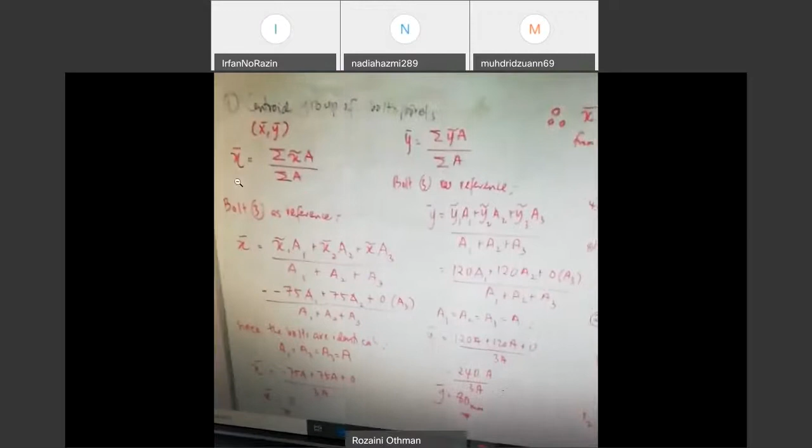And tetapi when we zoom in, actually what we want to determine is actually the shear loading on each rivet atau bolt, and then the shear stress. Right. So when we talk about shear loading, dan sebenarnya okay, saya rasa saya boleh saya nak try cuba buka apa ni

kalau kamu tengok dalam nota, if you refer the nota, so we just browse through the notes. Itu ni, tunggu sekejap ni. Rivet. Okay, this one is a bolt. Okay, bolt, alright. Okay, rivet. So, yang ni tak apa, ini just ni, yang ni kamu boleh baca sendiri. Yang ini pun saya dah explain dalam ni.

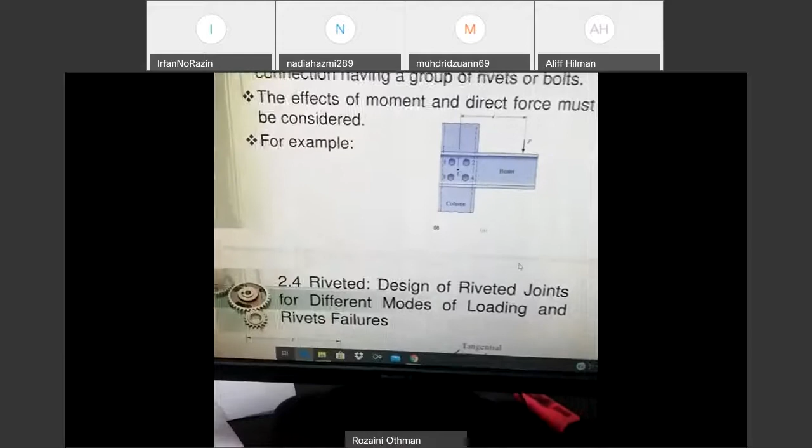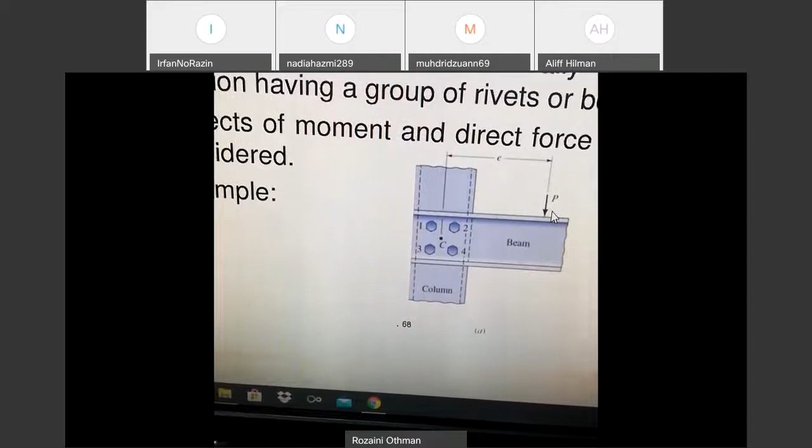Right. So sebenarnya, so just kita review sikit. Actually, when we talk about shear of rivet due to eccentric loading ni, sebenarnya is actually we have first a group of rivet ataupun a group of bolt. And let's say we have rivet number 1 and rivet number 2, 3, 4, and bolt number 1, 2, 3, 4. And then there is a force P ataupun external load P, and then this external load is actually at a certain distance from a group of rivet. Maknanya kita ada group of rivet ataupun bolt, dan in this group of rivet, we need to determine the C, which is a centroid.

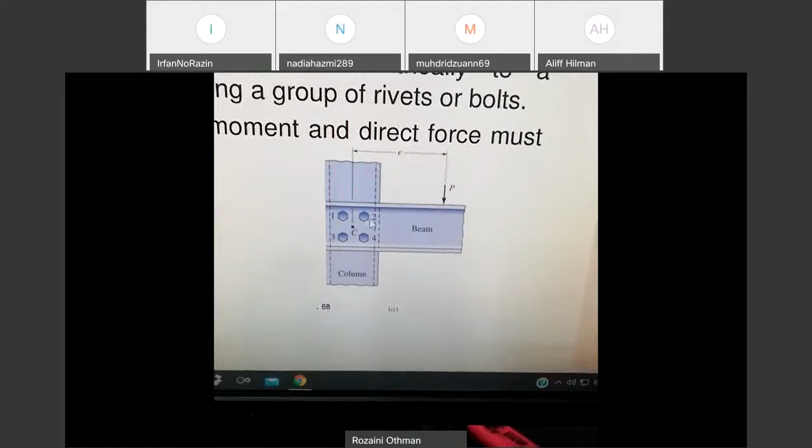So there is a load, external load P, which is exerted on the beam to the group of rivets, and then this P is actually at certain distance E, and this distance is perpendicular, so it can create a moment.

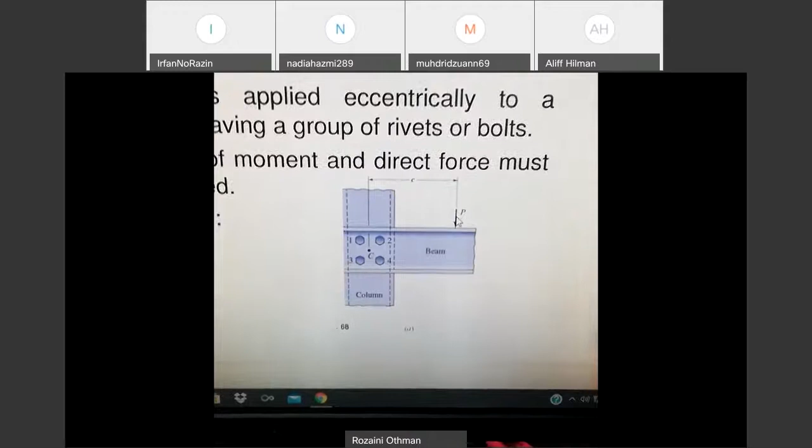Then there will be a moment M. So M equals P multiplied by E. P is an external load, E is the distance from the centroid to load P. So we have centroid C, then we have P, and a certain distance from C to P.

So when we have a force P and then a moment, there must be a reaction force acting on each rivet. There will be a reaction force. So that's why if you look, there are two types of reaction force. One is what we call direct shear, which is actually a reactional direct shear force.

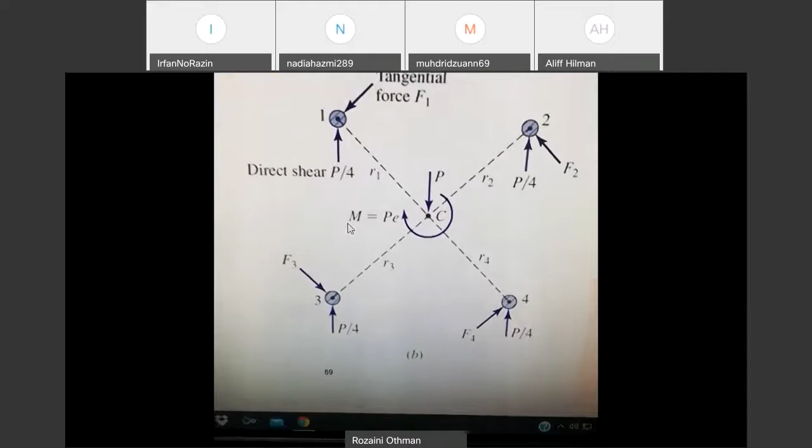Direct shear force or reaction direct shear force is actually the force P applied, divided by the number of bolts. In this case, we have 4 bolts or 4 rivets. So direct shear force, P is divided by 4, by number of rivets, meaning each rivet will have equally the same value of P. We need to divide by number of rivets. So that's the direct shear force.

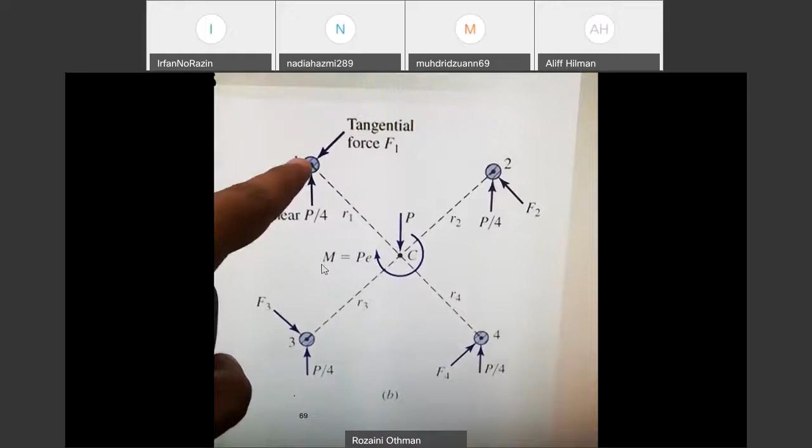Then for each rivet or bolt, we will draw one line which is the distance from rivet number 1 to the centroid, rivet number 2 to the centroid, rivet number 4 to the centroid, and rivet number 3 to the centroid. So this is the line from rivet to the centroid. From these lines, we can have a perpendicular force.

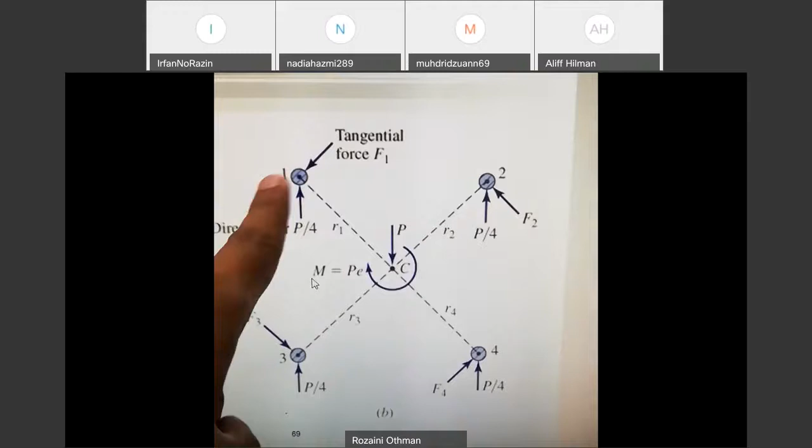This perpendicular force we call tangential force. This tangential force will create a moment. Earlier we had moment M equals P multiplied by E, right? So this tangential force will create a reactional moment, a reactional moment to the centroid, and its direction must be opposite, opposite direction to moment M.

So that's why you can see the forces, the tangential force is in this direction. It's not upward, it's downward like this. Why? Because it will produce a moment, force multiplied by this distance. Now this distance is R1.

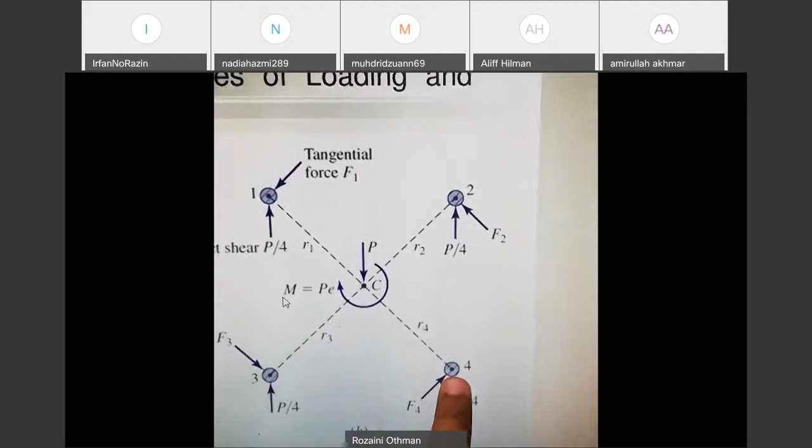R1 means the distance from rivet 1 to the centroid. R2 is the distance from rivet 2 to the centroid. R3 is from bolt or rivet number 3 to the centroid, and R4 is the distance from rivet or bolt number 4 to the centroid.

So this tangential force or reactional tangential force is actually creating a moment in the opposite direction of moment M, so these forces create moment in a counterclockwise direction. That's for rivet/bolt number 1, same also for bolt number 2, rivet number 2. So if you look at the direction like this, it will produce moment in the counterclockwise direction for both.

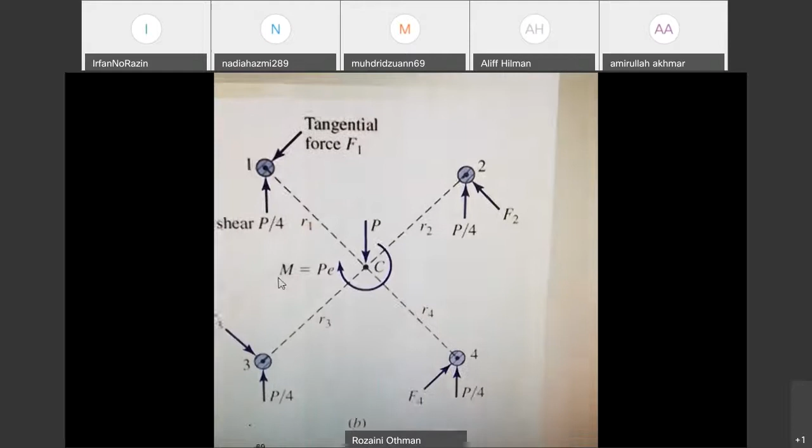Meaning every rivet, rivet 1, 2, 3, 4, will have two forces: the force due to direct shear force and the force due to tangential force. So this is the eccentric loading, or the analysis that we will do.

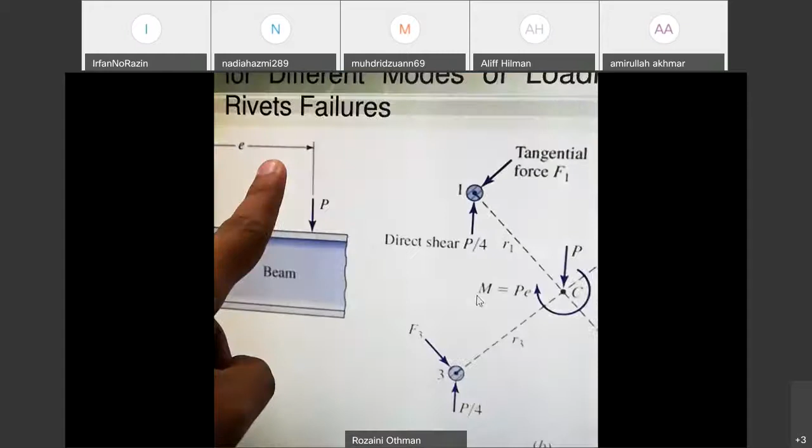In this topic we will have a group of rivets or a group of bolts. Then this group of bolts will have force P applied at some distance from the group of bolts, and so it will produce a moment. That's why there will be a distance from the centroid to the force P, given by E. So there will be a moment because of this external load P.

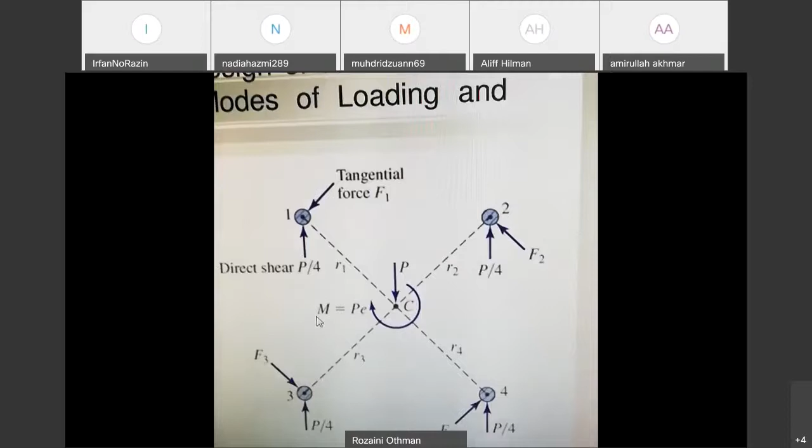But what's important is first we need to determine the centroid. Don't worry, later we will look at an example. So first we need to determine the centroid, and then we have to determine R1, R2, R3, R4, and then direct shear force, and then tangential force, and then we have to analyze for each rivet or bolt, because each rivet or bolt has two types of forces: direct shear and tangential force.

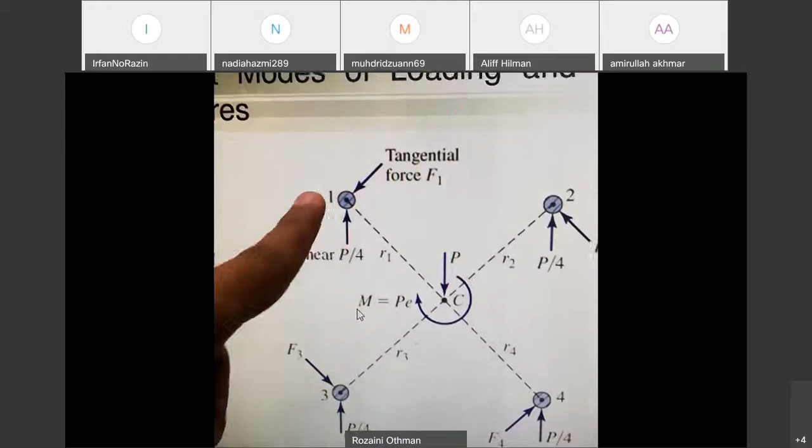So we have to do a summation of forces. Because this direction is in y, we can resolve this tangential force into x and y components. So we have a summation of force in x and y, and then we have a resultant of forces for each bolt or each rivet.

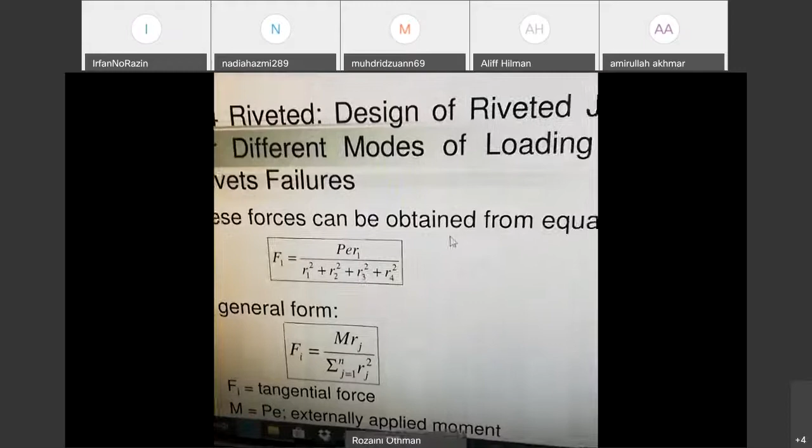If for rivet number 1 or bolt number 1, F1 equals PE, where PE is the moment. Moment multiplied by R1, since it's for rivet number 1. If rivet number 2, then R2, so it becomes F2, R2. Below this is the distance from each rivet or bolt to the centroid.

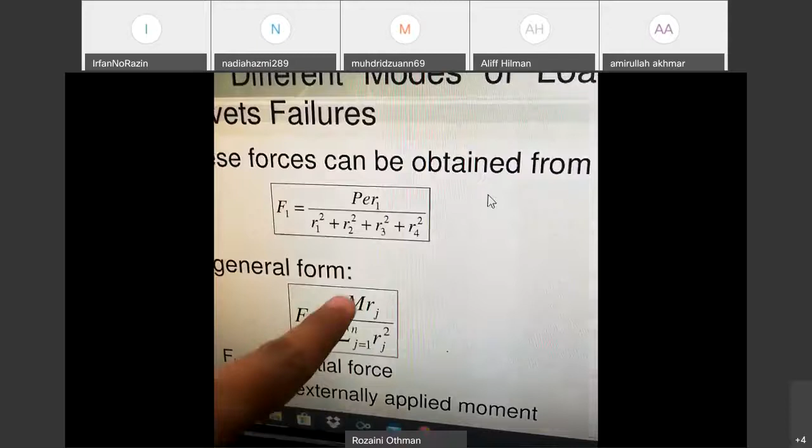But in the exam, the formula is given in the general form. So you need to know this general form, and from this general form, it actually becomes this.

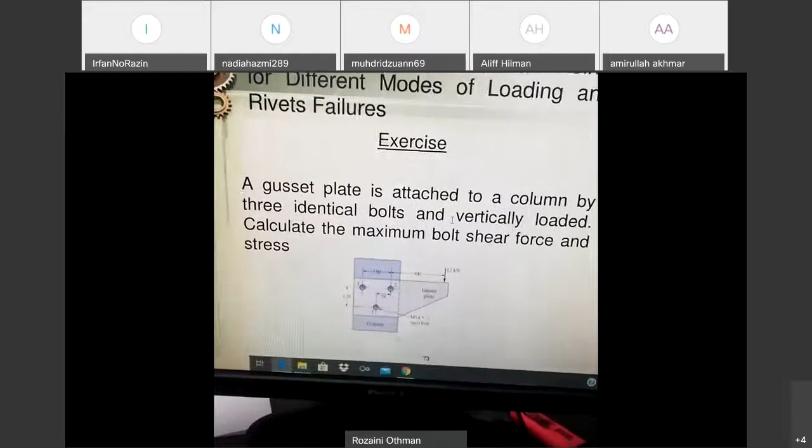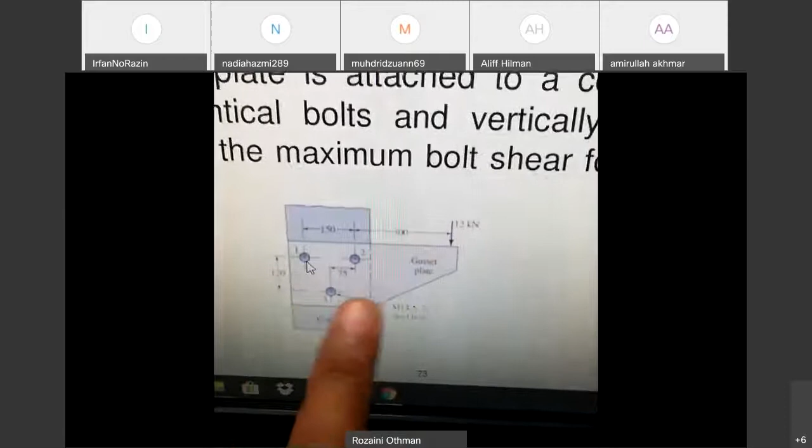In this example we will have 3 bolts, and it could be bolt or rivet. So say we have 3: bolt number 1, bolt number 2, bolt number 3. We have a force of 12 kilonewtons, and we have a steel bolt.

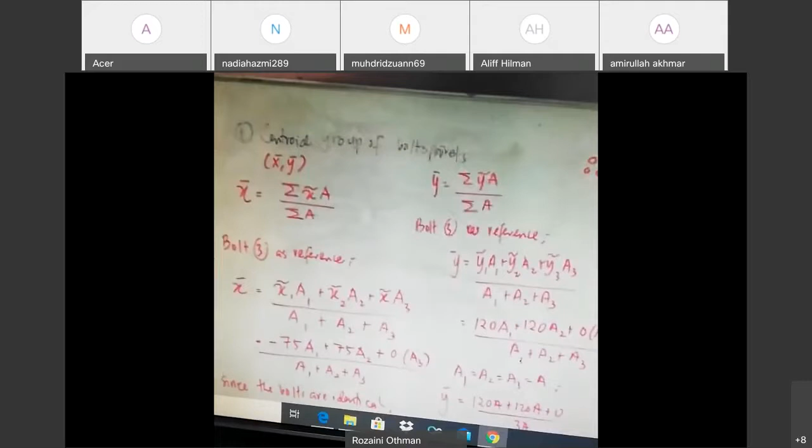In the previous class, if I'm not mistaken, I used bolt 1 as reference. So the reference actually, it depends. Sometimes the question mentions to you to use a certain bolt or rivet as reference, but in other questions maybe it doesn't require or mention which bolt or rivet to use as reference.

So it depends on you. In this case, I just take bolt 3 as reference in this example, while in the class example I used bolt number 1 as reference. So you can see the difference.

Okay, the equation we use, this equation, I'm not sure if it's given in the list of formulas. So in order to determine the centroid in x coordinate and y coordinate, we use this formula: summation of x bar A divided by summation of A.

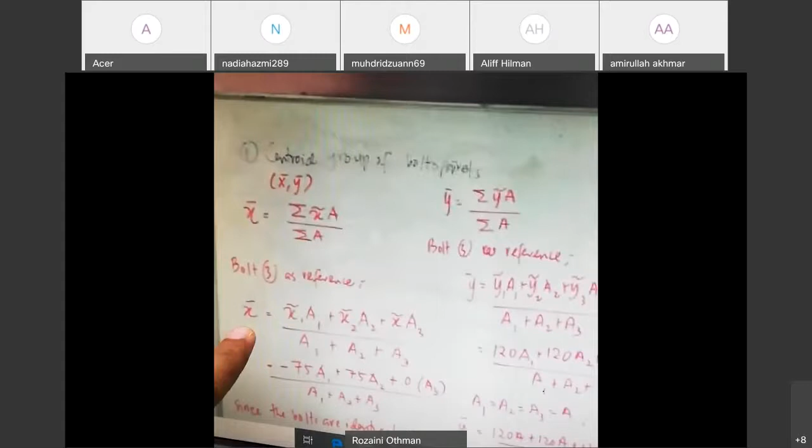So for example, we take bolt 3 as reference. So x bar equals x1 bar a1 — this value is referring to bolt number 1 or rivet number 1 — plus x2 a2 plus x3 bar a3, divided by a1 plus a2 plus a3.

Now, in this example, I put negative 75. Why? Because in the question, if you look at it... where was it...

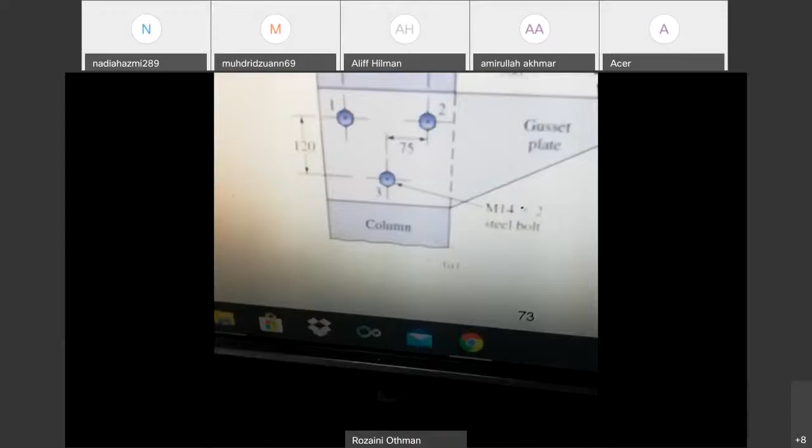Dalam soalan ni, bolt number 3 adalah reference. Bolt number 1 sebenarnya di sebelah kiri, in the left side, so left side kita ambil sebagai negative 75. Jadi negative 75 times dengan A1.

A1 bolt. Dan kemudian plus, bolt number 2 sebenarnya 75 daripada bolt number 3, dan dia ke kanan, so 75 A2 plus 0, sebab bolt number 3 sebagai reference. Reference dia tak ada distance, kosong. Kosong A3, divide by A1 plus A2 plus A3.

Disebabkan dalam soalan mention bolt are identical, bila identical ni sama, bila sama maknanya diameter sama, area semua sama. So area for bolt number 1 equal to area bolt number 2 equal to area bolt number 3, equal to A. Kita just letak A. Kalau nak cari nilai A pun tak ada masalah, A ni area cross sectional area, A equal to pi d square over 4. Sama je sebenarnya, tetapi untuk memudahkan jalan kira, kita just represent A, dan disebabkan semua bolt sama.

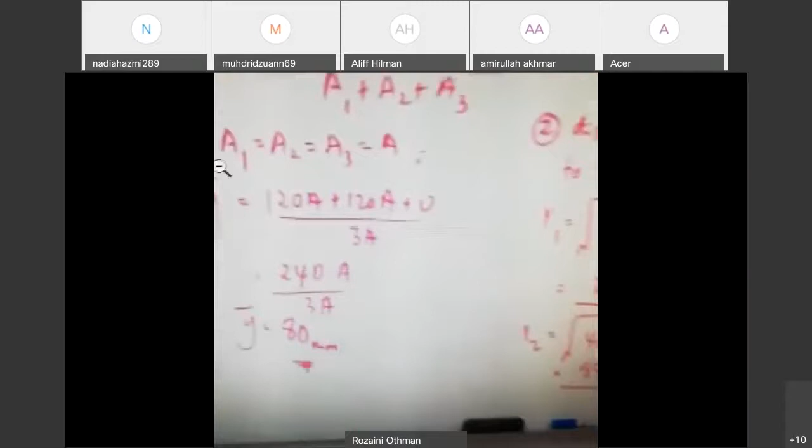So kita akan dapat Y bar sama dengan 80. Apa maksud dia? Maksud dia kedudukan Y ni, dia adalah 80 mm daripada C dan dia berada di atas. Bolt nombor 3 kan 80 mm.

Maknanya sekarang ni, bolt nombor 3. So X kosong maknanya dia dekat sini, dekat tengah-tengah ni. Dia dekat sini, so line ni. Lepas tu dia kata 80 daripada 3, so daripada sini 80. Maknanya lebih kurang tengah ni lah. So kita akan dapat macam ni, from bolt number 3 dia (0, 80).

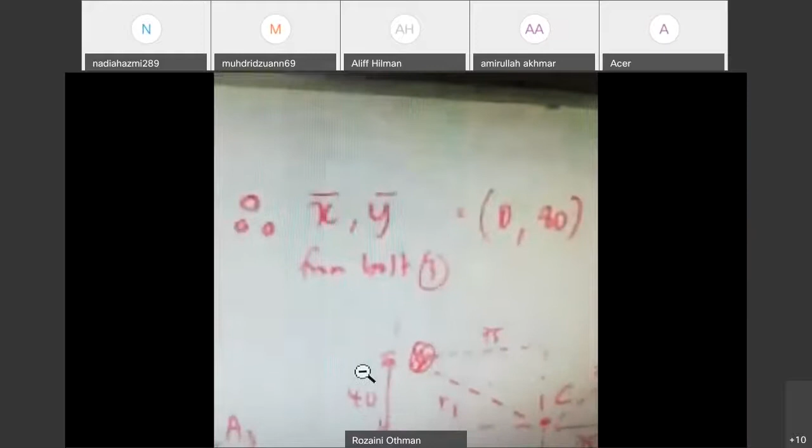Kalau kamu perasan dalam previous class kita buat bolt from bolt number 1. From bolt number 1, X bar dia tak sama, X bar dia daripada bolt number 1 dia 75. Maknanya kalau daripada bolt number 1 ni dia 75, 75 daripada bolt number 1 ke kanan sini. Lepas tu Y dia 40, maknanya daripada rivet number 1 sebagai reference ni 40 ke bawah. Actually sama je sebenarnya.

Apa yang penting ni kita nak determine dia punya centroid of group. Centroid ni adalah centroid bagi group of rivet. Kita ada group dia, bentuk dia macam ni, so kita kena cari titik tengah bagi group ni.

Okay, boleh saya rasa saya explain banyak ni. Harap orang faham lah.

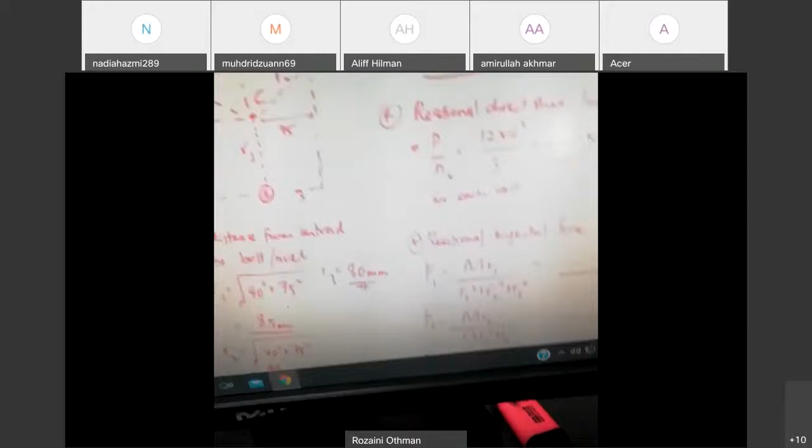Okay, anyway, right, so this is centroid dia. Centroid dia kat sini tengah ni. So kita ada R1, R2, R3. Seperti mana yang saya sebut, R1 is a distance from rivet ataupun bolt number 1 to the centroid. R2 is distance from rivet 2 to the centroid. R3 from rivet number 3 atau bolt number 3 to the centroid.

Baik, so this is center dia. Kemudian sekarang ni kita nak cari nilai R. Jadi kita cari nilai R. R dekat sini distance dia, jarak dia berapa? So dia hypotenuse kan?

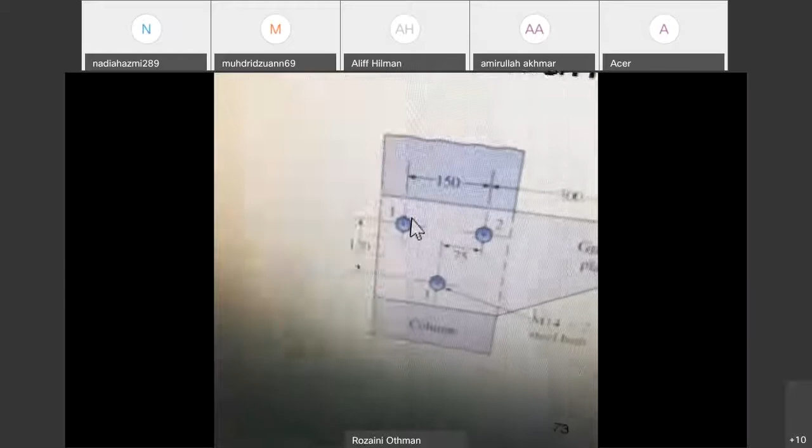Remember, moment is actually from the external load to the centroid of a group of rivets/bolts. Ingat centroid. So in this case, P is 12 kilonewton, E is the distance, 0.3 plus 0.075, this is the distance from load to the centroid. So we get the value of M.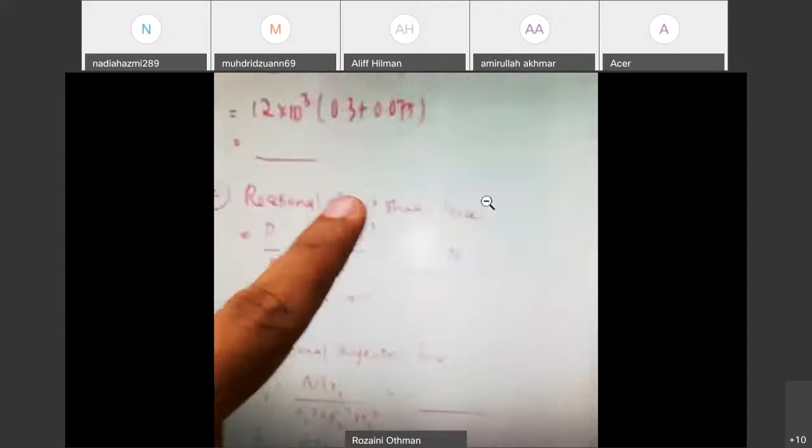Okay, try calculate while listening, I'll give you time. Then the fourth step is you need to calculate the reactional direct shear force. Reactional direct shear force is the external load divided by number of bolts. So we have 12 kilonewton divide by 3 number of bolts, so we get 4 kilonewton. That's the fourth value - remember reaction direct shear force value is external load divided by number of bolt.

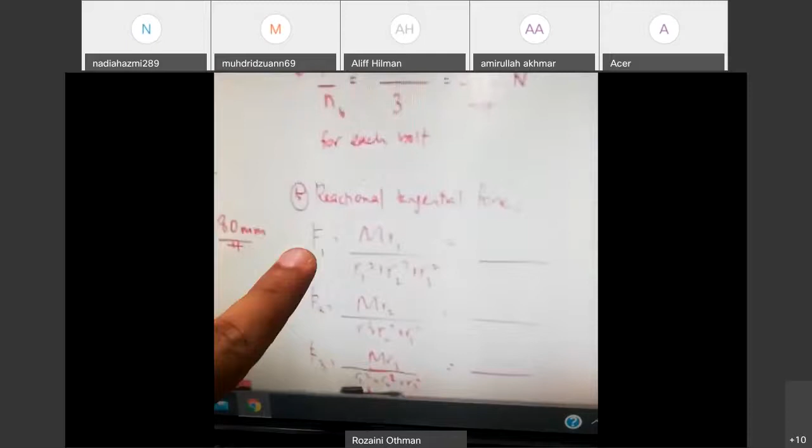Then the fifth is reactional tangential force, calculated using this formula. F1 equal to M times R1 divided by R1 squared plus R2 squared plus R3 squared. M is the moment we got above, multiplied by R. So F1 for R1, F2 for R2, F3 for R3. Since R1 and R2 are the same, F1 will equal F2, and F3 will be different.

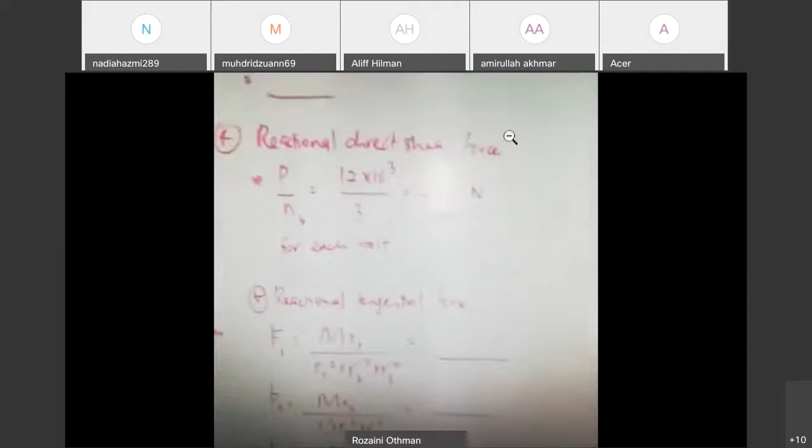Can you calculate it? Try calculating. Calculate the value of the moment and then F1, F2, F3. So I'll turn off my video now. Try calculate first - what I have on the side, you look at the WhatsApp group. Then write in the chat what value you got. Write down the value you get for moment, and number 4 is already there, then number 5. So maybe you can write down the value of moment and also reaction tangential force, just post it in the chat.

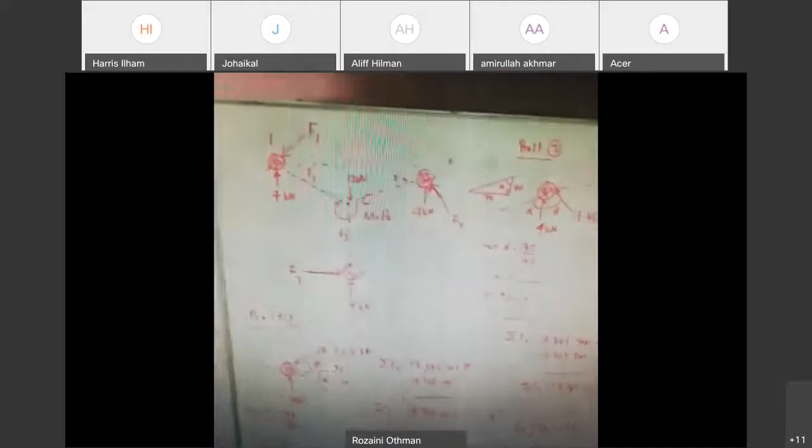So sekarang ni kalau kita dah dapat nilai ni, janganlah live lagi. Video. Okey sir, okey sir.

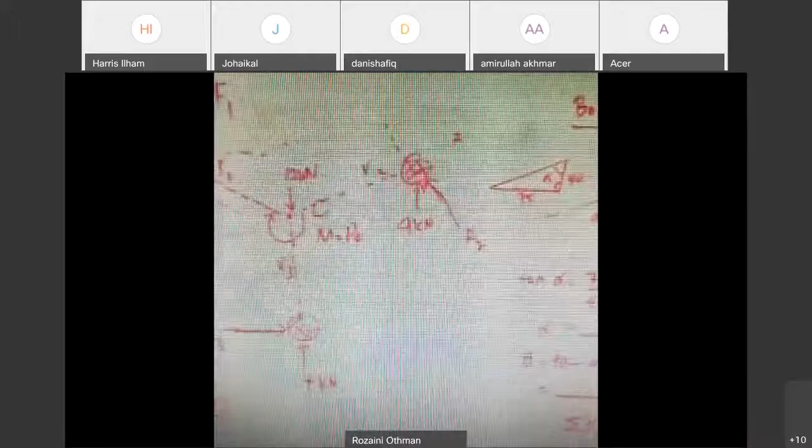Okay, alright. So sekarang ni, selepas kita dah determine nilai tadi, lepas tu kita kena draw balik free body diagram. Kamu draw free body diagram macam ni, sebab dalam exam akan diberi markah juga kalau kamu draw macam ni. So maknanya setiap at each rivet or bolt, it will have two forces, which is F1 tangential force and also direct shear force. Alright, so we have two forces for each rivet.

Now, okay, we know that the distance from rivet 1 to 3 is given by R1, R2, R3. And okay, direct shear force, kita dapat 4 tadi, kan 4, kan 4. Contoh macam ni.

Okay. Now, untuk rivet number 1, so 4 daya ke atas. Sebab apa daya ke atas? Because this one is a reaction. The external load is actually 12 ke bawah, kan? So the reaction must be opposite direction. So that's why dia ke atas. And direct shear force.

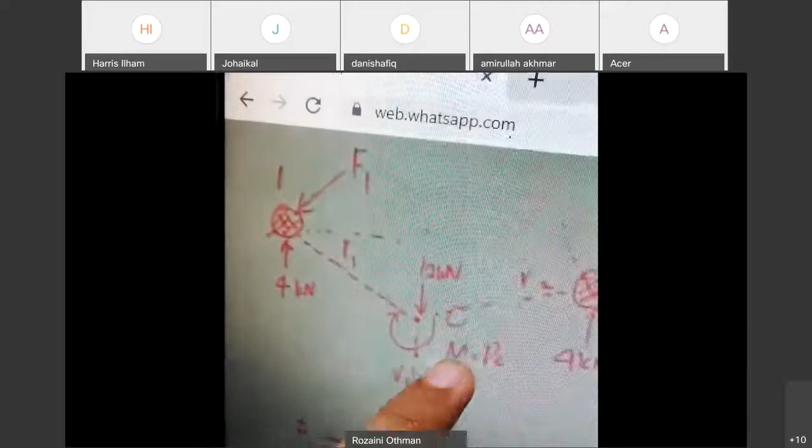Kemudian kita ada F1. F1 ni adalah reaction tangential force. Kenapa dia macam ni? Because this force is perpendicular, serenjang dengan R1. Kenapa perlu perpendicular? Sebab daripada F1 ni dia akan create moment. Arah moment must be berlawanan dengan arah moment daripada external load tadi. External load arah moment dia adalah clockwise. So moment from the tangential force must be counterclockwise.

Dan arah dia must be, kita kata perpendicular. So that's why kamu ada daya yang perpendicular dengan benda ni dan arah dia ke bawah, because arah ke bawah ni it create an anti-clockwise moment atau counter-clockwise moment. Okay. Right. So that's for rivet number 1.

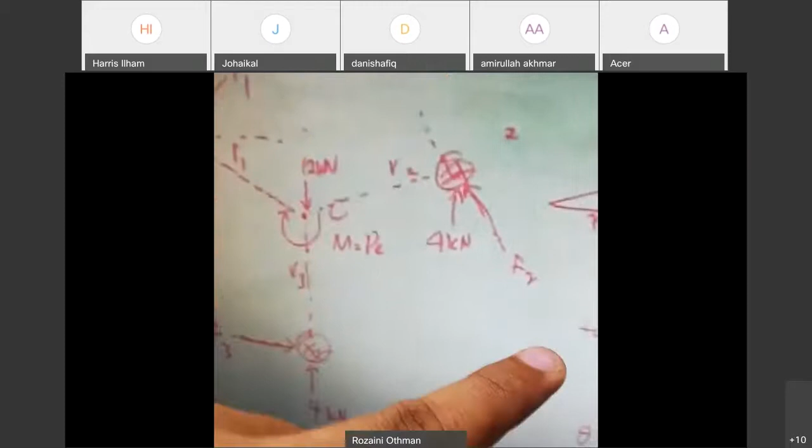Rivet number 2, daya dia macam ni pula. 4 sama ke atas, sebab dia direct shear force, so memang ke atas. Cuma F2 dia ke bawah, dia macam tu pula. Sebab apa? Sebab tadilah kita ada distance R2, rivet number 2 to the centroid. Dan kita akan ada daya yang perpendicular to the R, dan arah dia must be ke atas begitu. Because this direction will create an anti-clockwise moment to the centroid.

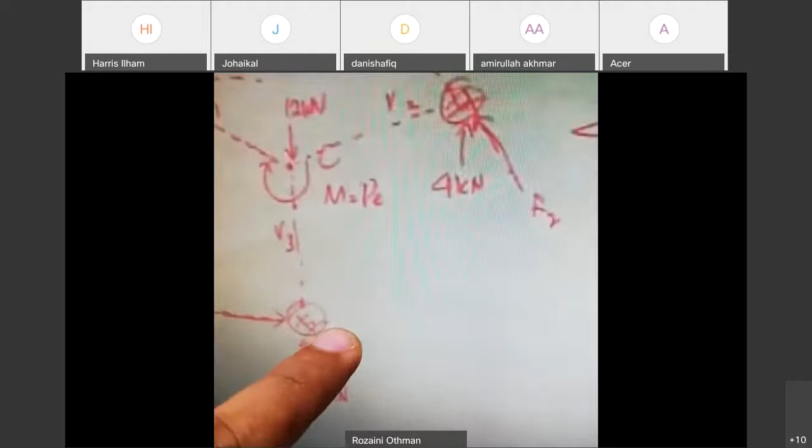Okay. Dan begitu juga dengan bolt number 3. Bolt number 3, direct shear force 4 ke atas. Kemudian F3 ni, dia macam tu pula. Sebab apa? Sebab dia adalah, these forces must be perpendicular to the R. And then it will create a counterclockwise moment, the opposite direction of the moment from the external load. So dia akan ada moment yang counterclockwise. Moment from rivet bolt number 1 counterclockwise, rivet number 2 counterclockwise, rivet number 3 counterclockwise. Okay, alright.

Okay. Alright. So satu persatu. Okay. So bolt number 1. Okay. So 18.34 kilonewton yang kamu dapat tadi. Kemudian, okey, yang jadi masalah sekarang ni, masalah dalam kamu jawab soalan ni sebenarnya, nak cari angle ni, theta dengan alpha ni. Okey, yang tu yang banyak yang salah, banyak yang jadi keliru. So tak apa, let's say kita ada bolt number 1 macam ni.

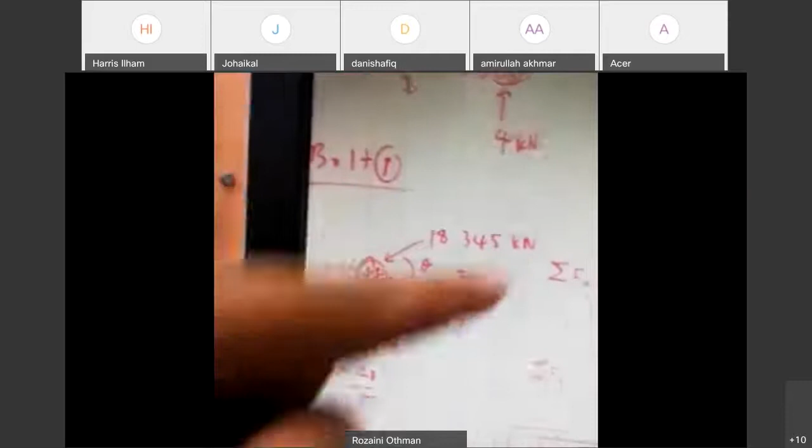So let's say this is F1, 18.345 kilonewton. Then we just take the angle theta here. Kita tahu distance kat sini adalah 75, daripada yang kita dapat tadi, centroid tadi, and the centroid. We know that 75 millimeter. Kemudian this one is R1, dan juga distance di antara centroid is 40 mm.

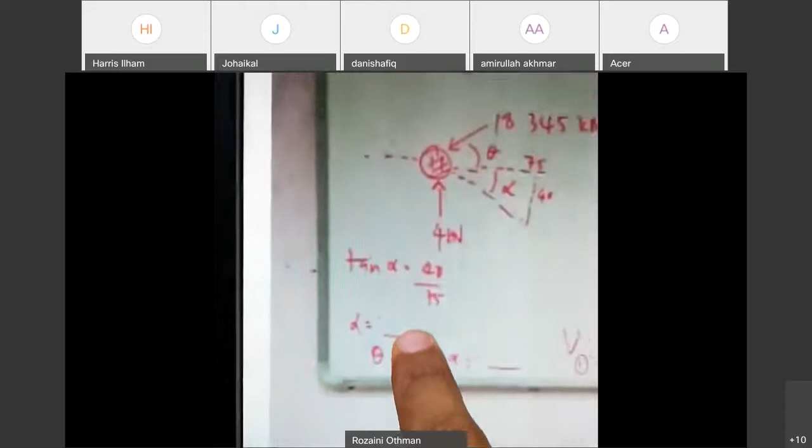So daripada sini kita dapat alpha. So tan alpha, tan alpha equal to 40 bahagikan dengan 75. So kita akan dapat nilai dia. Lepas dapat alpha, sebenarnya apa yang kita cari? Kita yang cari theta. So 90 tolak alpha dapat nilai theta. Right? So after you have determined nilai theta...

...summation of forces in Y. So summation of forces in Y, kita ada... in X, macam Y. Ni X, summation of forces in X. So for X, summation of forces for X adalah 18.345 kali cos theta. Kita cari cos theta, so ini daya ke kiri macam ni. So kita akan dapat 18.345. So kamu boleh letak negatif, tak apa. Untuk memudahkan kamu letak negatif pun tak apa, letak negatif, maksudnya dia ke kiri lah. Okay. So and then that's for summation of forces in X. So summation of forces in Y.

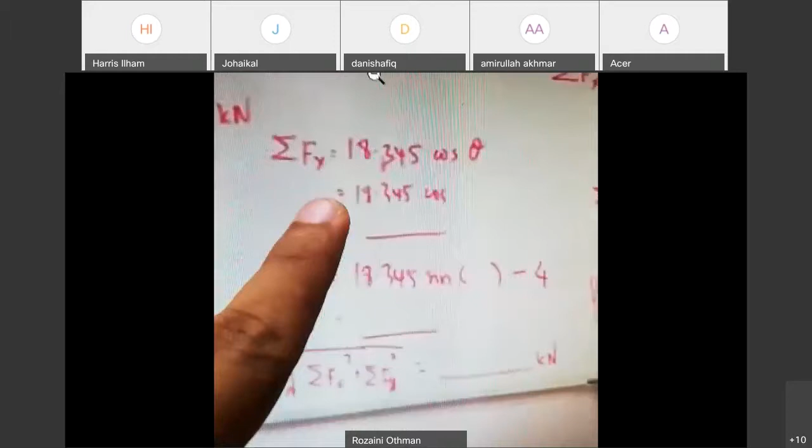So we have 18.345 kilonewton sin theta. Bila sin, saya tolak ni, saya tolak 4 ni. Actually kamu okay, mungkin salah, kamu buatlah 4 ni ke atas sebenarnya. 4 ni positif lah, kita ambil senam macam ni lah, maksudnya ke atas sebagai positif, ke bawah negatif lah. So saya terbalik lah, sebenarnya boleh je kamu nak letak ni ke bawah sebagai positif kan. Tak ada masalah benda ni, sebab apa, sebab nanti kita akan ada...

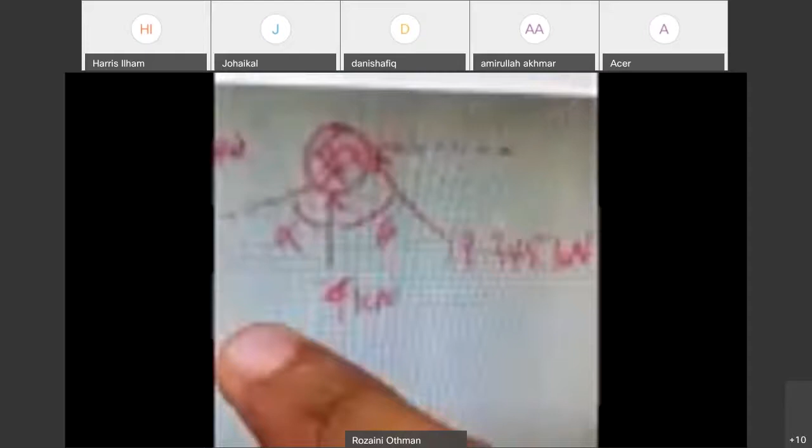So selepas dapat alpha, dapatkan theta. Okay, faham kan? And then kita buat summation of forces. Yang ni pun saya buat dia ke kiri juga kan, dia ke kiri, dia summation of forces ke kiri, so negatif lah. Negatif 18.345 sin theta, and sin sebab apa sin? Theta kat sini, kan theta kat sini. So bila kita resolvekan dia ke sana lah, bila ke sana maknanya dia guna sin theta. Okay, alright. So kita dapat negatif in summation of forces in the X. Kemudian summation of forces in Y, so kita ada positif sebab kita ada Fi. So 18.345 cos theta campurkan dengan 4. So dua-dua positif, dan kita dapatkan resultant.

And then untuk bolt number 3, kita hanya ada arah X ke kanan dan juga arah Y. Dan so kita ada summation of forces in X sama dengan 17.266. Kemudian summation of force in Y kita ada 4. So dapatkan resultant, kamu akan dapatlah resultant dia. Okay, kamu cari dulu boleh? Resultant, all the resultant, kamu cari resultant untuk bolt number 1. Okay, and then kamu cari resultant untuk bolt number 2, kemudian kamu cari resultant untuk bolt number 3. Nanti kita continue lagi nah. Cari dulu tau, okay right? So okay, kita cari dulu. Thank you.

Okay. Okay. Ada tak?

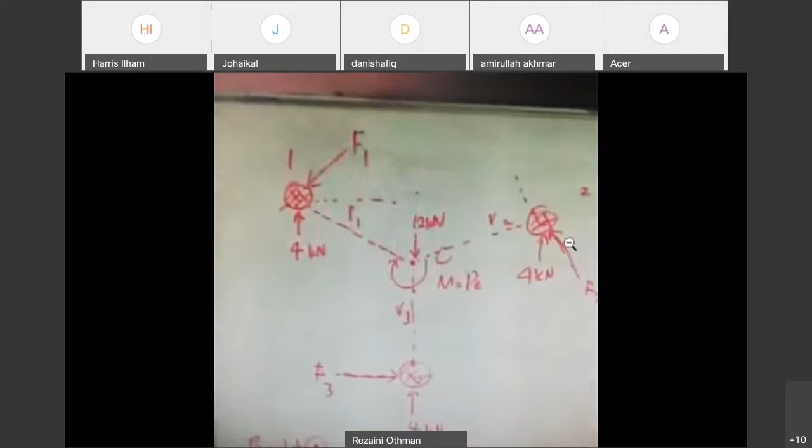So kita dah apa ni cari, we need to determine the resultant of forces. So this resultant of forces is actually the shear force for each bolt and rivet. Okay, so please make sure in your exam you determine each of the rivet ataupun bolt, because if you determine for each, so you will get the marks for each value that you get from each rivet. So there will be a mark for each rivet, the resultant of forces. So okay, please make sure.

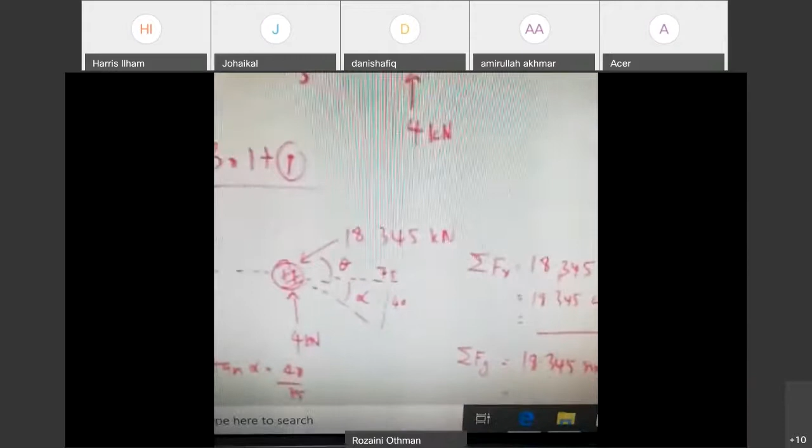Kemudian, dan satu benda lagi adalah angle lah, yang banyak yang salah di kalangan student untuk determine angle kan. So determine angle tu memang ni jugalah, maknanya kena praktis lah. Tapi dia simple lah, angle ni dia melibatkan tangent lah, tangent, sin, cosine. Okay, so tapi nak kena tengok lah.

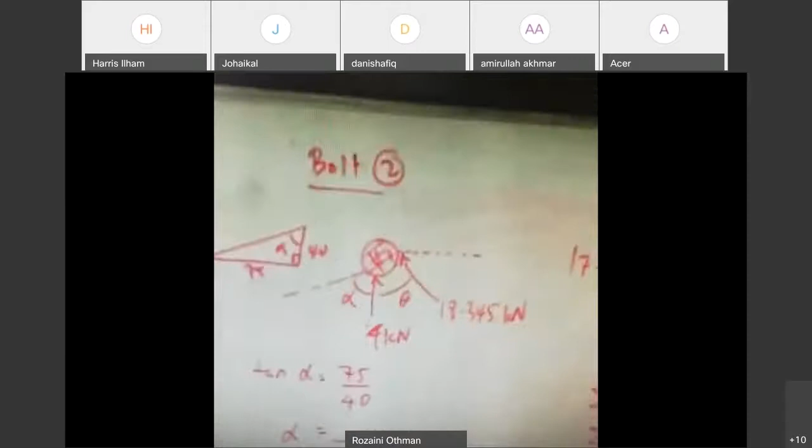Bolt number 2. Kalau yang bolt number 1 tadi kamu letaklah negatif maksudnya apa ni, untuk arah X sebab dia ke kiri, bila after you resolve to the left, so negatif lah. Okay, and similarly for bolt number 2, dia ke kiri juga, so for X is negatif lah. Summation forces in X is negatif, tetapi summation force in Y is positif sebab dia ke atas. Macam bolt number 1 ni, summation of forces in Y also negatif lah, yang apa tu, yang 18.34 sin tu yang negatif ni, tapi yang 4 ni positif. 4 positif. Situ. And then right.

Bolt number 3 has forces in both X and Y directions. So summation of forces in X is 17.266 kN and summation of force in Y is 4 kN.

Okay, right. So cari dulu resultant of forces for bolt number 1, bolt number 2, and bolt number 3.

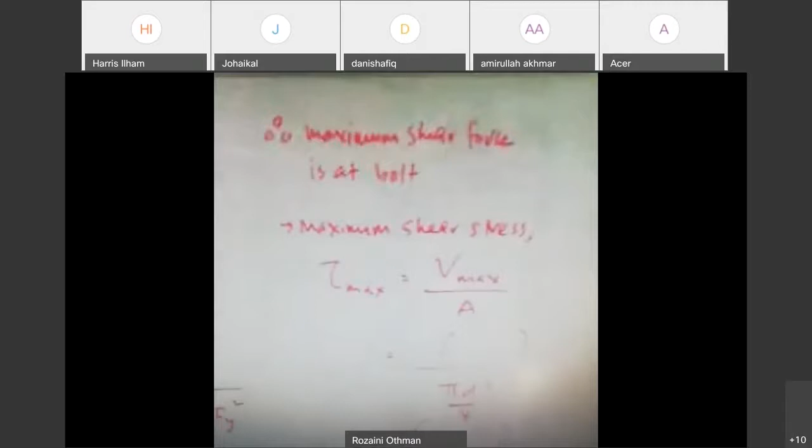Therefore, bila kita dapat, maknanya the value of maximum is 21. In terms of maximum shear force, is at bolt number 2. Bolt number 2, so, bolt number 2.

And then, in order to determine maximum shear stress, we use a formula tau max equal to V max over A. Now, V max is the value of resultant of forces pada bolt number 2.

Yang kita dapat tadi lah, yang maximum shear force tadi, kan? Which is 21.2, kan? Alright, so that's your V max. And then divide by A. A is cross-sectional area of bolt ataupun rivet.

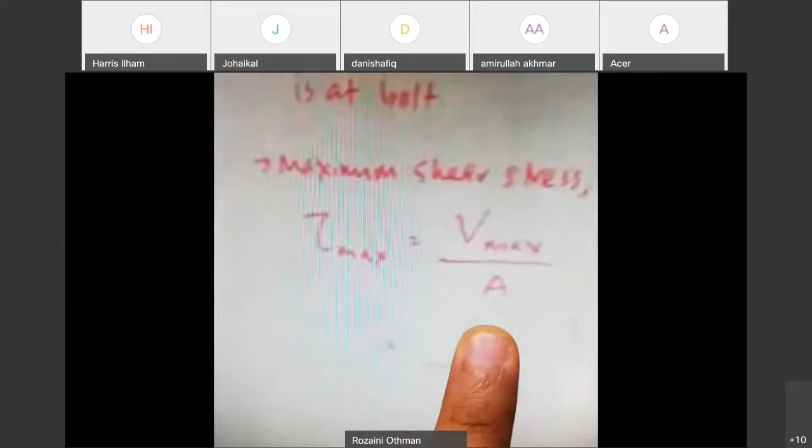Cross-sectional area of bolt kita dapat dengan pi r squared ataupun pi d squared over 4. Pi d kuasa 2 bahagi dengan 4 lah. Kan? Right? So ini value dia.

So kamu just masukkan nilai V max, pi d squared. V max, okay, D. D dalam case ni diberi dalam soalan which is 14 millimeter, right? And then kamu akan dapat berapa Pascal. So itu adalah tau max. Okay.

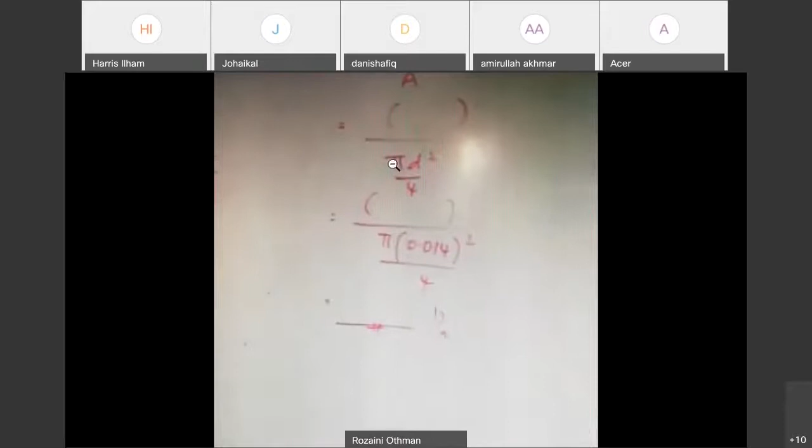Dia dapat, so kamu kira. So this is maximum shear stress.

Okay, macam mana dapat? So what do you get? Sorry, mungkin saya akan...

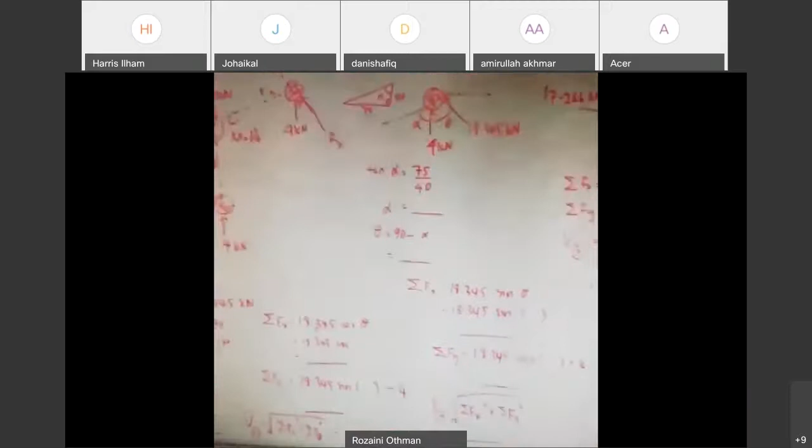Okay, so next time mungkin saya try guna saya punya PC, PC dia punya line lagi cantik lah kan.

Okay, Johaikal dapat. Siapa dapat kan lu? Hilang mana? Okay, alright. Okay. Alamak. Alright. Okay. So alright, so siapa dapat dulu? Okay, nombor apa ni?

Dah kena warning dah, warning ni. Okay, right, so then dapat lah. It's about 142.7 megapascal. Okay.

Alright, so that's good. Okay, hopefully kamu boleh faham topik saya ini. Dia sebenarnya macam ni, I just want to recap. Topik ni, topik apa ni yang rivet dan juga bolt ni.

So the diameter is we use the diameter of a bolt as in the question. Dalam apa ni, dalam soalan tu ataupun rivet lah. And soalan ni dia M14 kan? This question is a M14, maknanya 14 mm. So the diameter is we use the 14 mm.

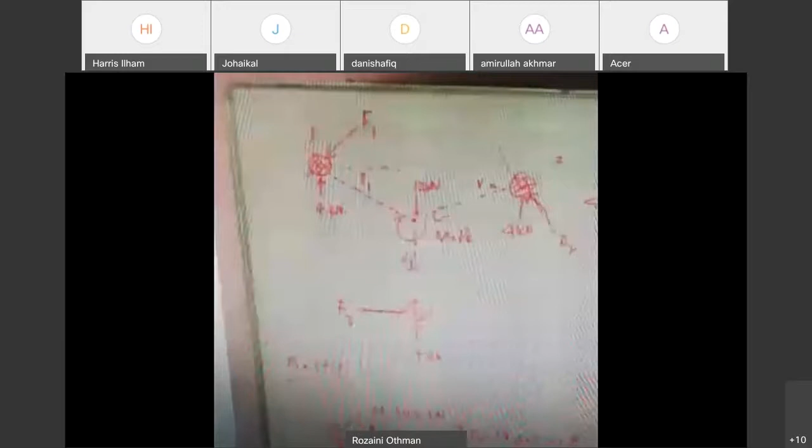To determine the centroid, you need to know the cross-sectional area of the rivet or bolt, whether the area is the same or different. Please pay attention, because sometimes the question will confuse you by giving different area values, for example rivet one area is 20, rivet two is 30, rivet three is 40, so the areas are not the same.

The second step is you need to determine the distance to the rivet, R. So you have R1, R2, R3, meaning the distance from rivet 1 to the centroid, R2 from rivet 2 to the centroid, and R3 from rivet 3 to the centroid.

Usually for R, you use the hypotenuse, the Pythagoras theorem. And then the third step is moment.

Moment equals load P, the external load, multiplied by distance E. You need to be careful with distance E - pay attention, because E is actually the distance from the external load to the centroid.

So that's the value of E. After that you determine the direct shear force, which is the force divided by the number of bolts. For example if the force is 12 and the number of bolts is 3, then it's 12 divided by 3. If there are 4 bolts, divide by 4.

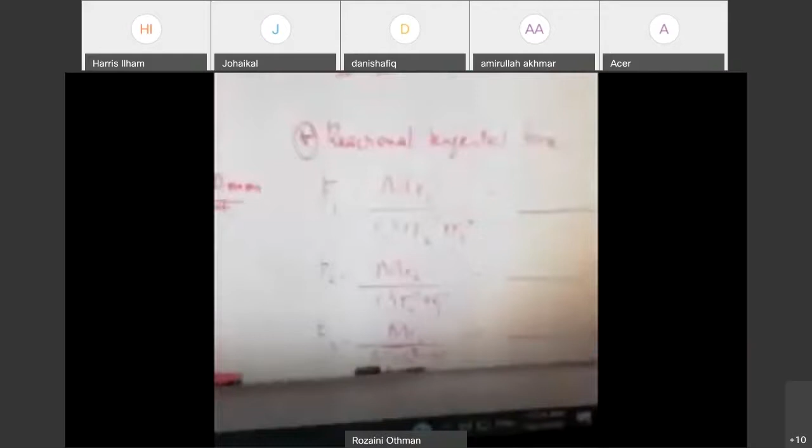draw a free body diagram showing every force present. So you have bolt number 1 with direct shear force and tangential force, bolt number 2 with direct shear force and tangential force, and bolt number 3. You do this one by one.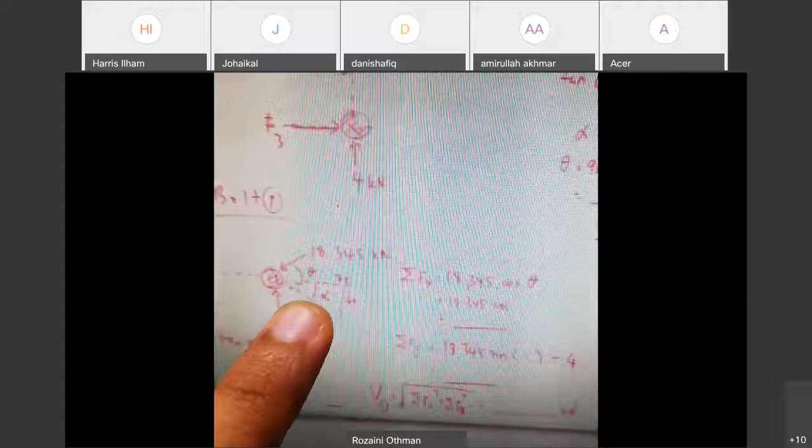Please make sure you calculate the correct angle for bolt 1, bolt 2, and bolt 3. After that, from the analysis you need to get the resultant for each bolt - resultant for bolt number 1, number 2, and number 3. Then from these three, you determine which is the maximum. After determining the maximum, you get the maximum stress, V max divided by A, and substitute the value to get the maximum shear stress.